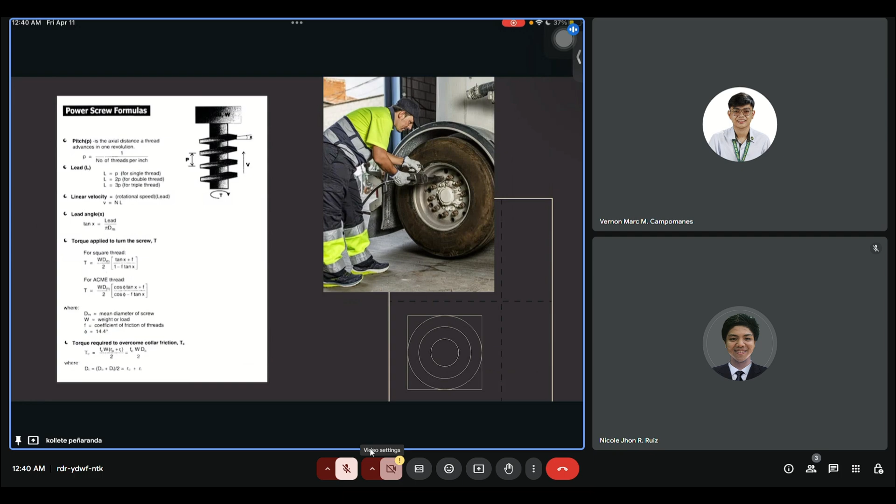Total torque to operate the screw. Total torque is equal to torque plus TC. The output power of screw, PO, is equal to weight times linear velocity of screws. Power input of screws, or PI, is equal to 2 pi Tn. Efficiency of power screw. For square thread, efficiency is equal to power output over power input. Or it can be tangent x times 1 minus f tangent x, all over tangent x plus f plus FC DC over dm times 1 minus f tangent x.

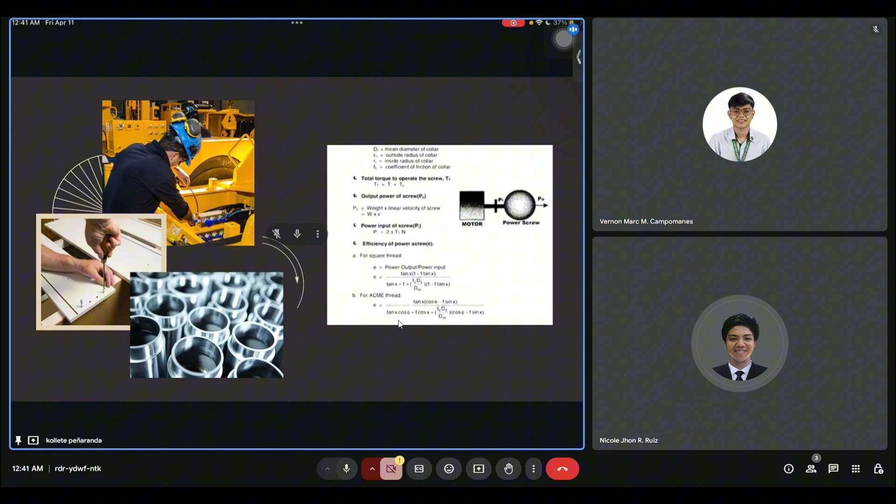For Acme thread, efficiency is equal to tangent x times cosine angle minus f sine x, all over tangent x cosine angle plus f cosine x plus FC DC over dm times cosine angle minus f sine x.

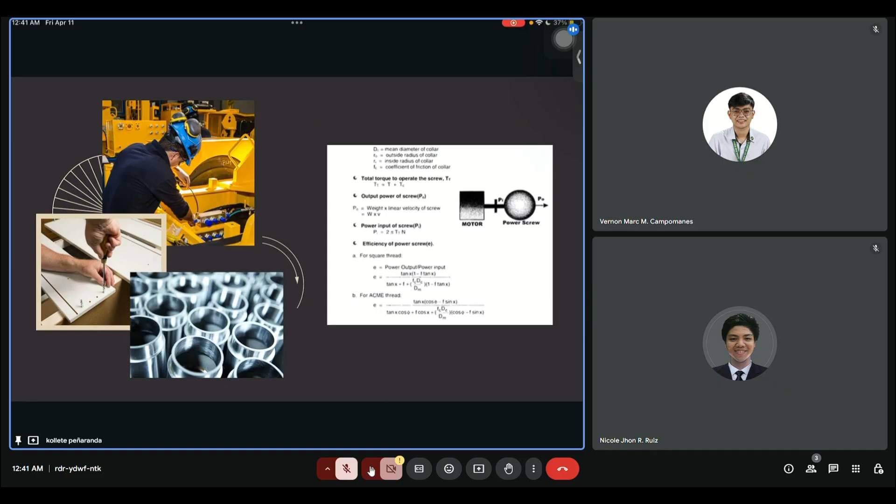The torque required to overcome collar friction of a 100 millimeter mean diameter collar power screw is 50 Newton meter, and collar friction of 0.15. Determine the weight lifted by the screw. The given is diameter mean, collar friction, and the torque of the screw. The formula that we will use is TC is equal to FC W times outer radius plus inner radius all over 2. And diameter mean is equal to outside diameter plus inner diameter all over 2.

The solution is, the given is diameter mean, so we're going to transpose it, and I will evaluate the formula to make the given useful. So dm is equal to the outside diameter plus inside diameter, equivalent to 2 times outer radius plus 2 times inner radius all over 2. So we can remove the 2 by extracting the 2 in the outside radius and inner radius. So what we have left is RO plus RI is equal to 100 millimeter or 0.1 meter.

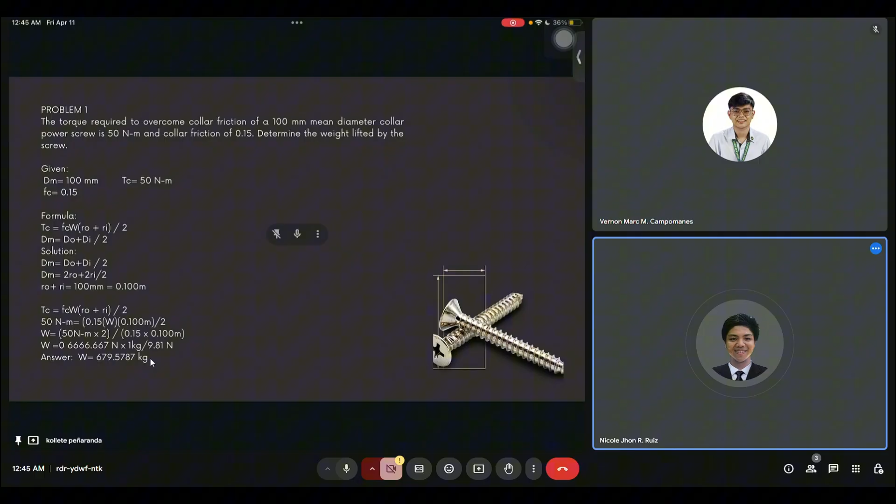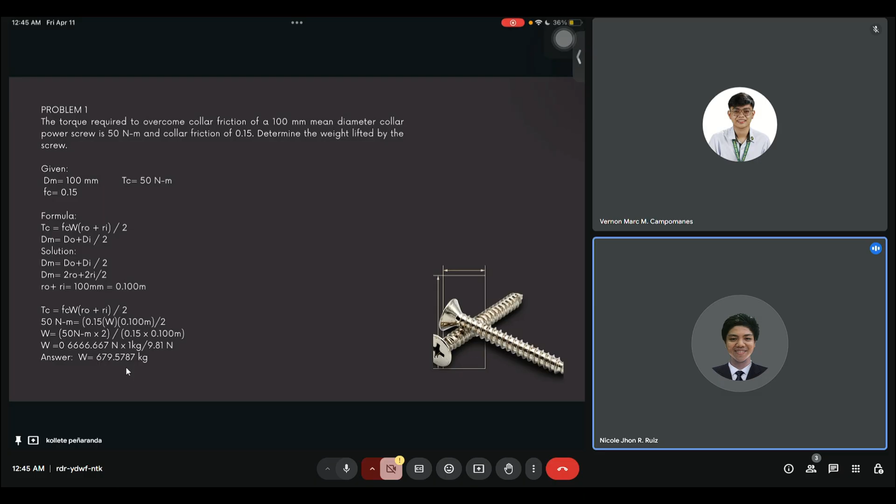The final answer will be 679.5787 kilogram. For problem 2, find the horsepower loss when a collar is loaded with 1,000 pounds, rotates at 25 rpm, and has a coefficient of friction of 0.15. The outside diameter of the collar is 4 inch and the inside diameter is 2 inch.

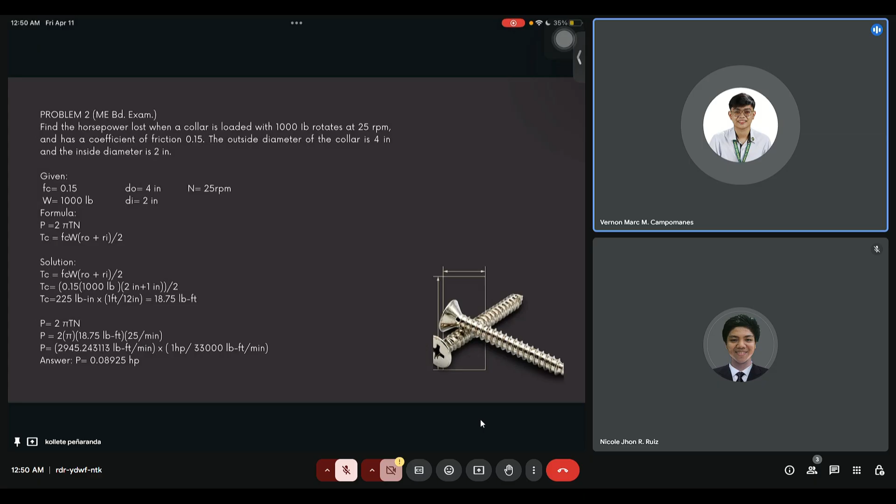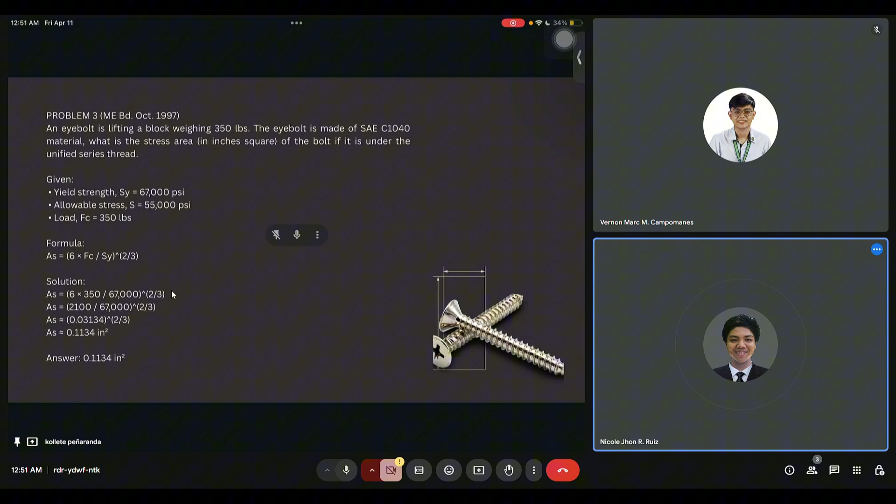Problem 3: an eye bolt is lifting a block weighing 350 pounds. The eye bolt is made of SAE C1040 material. What is the stress area in inches squared of the bolt if it is under the unified series thread? The given is yield strength, allowable stress, and load. The formula that we're going to use is stress area is equal to 6 times Fc over Sy raised to 2/3. The solution is 6 times 350 over 67,000 raised to 2/3. And the answer we will get is 0.1134 inch squared.

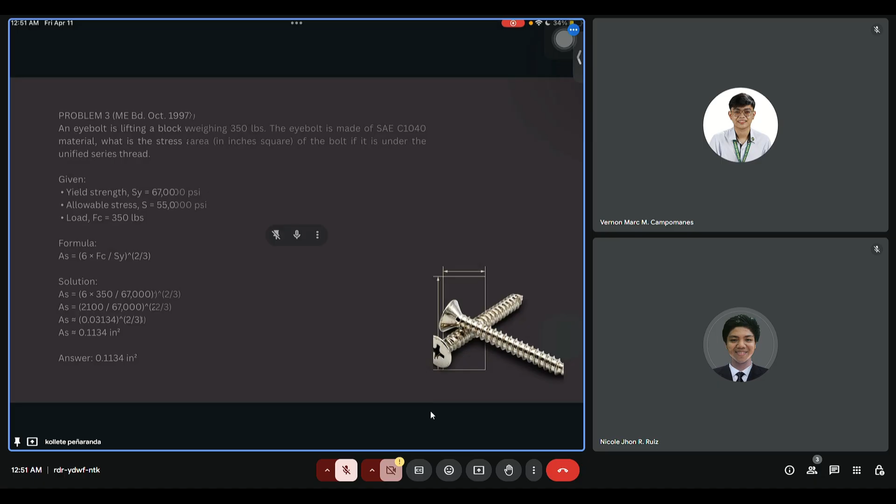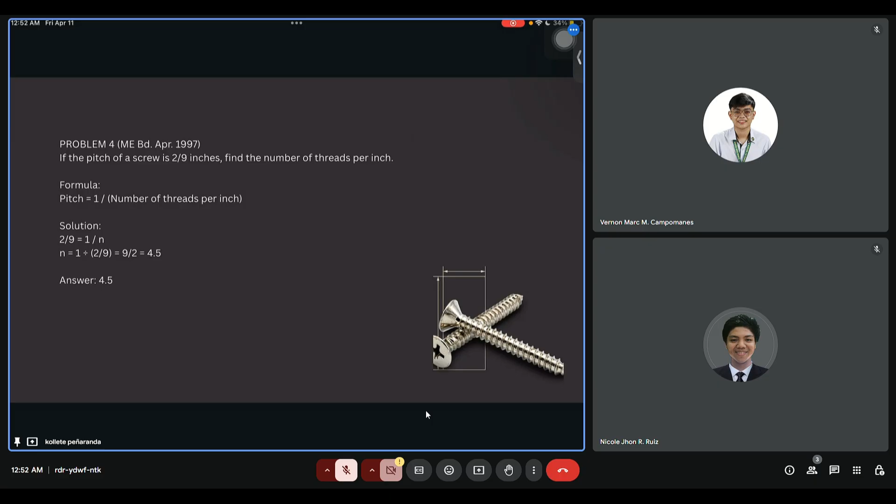Problem 4. If the pitch of a screw is 2/9 inches, find the number of threads per inch. So the formula that we will use is pitch equals 1 over number of threads per inch. By using this formula, we can solve the problem by simply using shift solve, or we can transpose: the number of threads per inch is equal to 1 over pitch. And the answer will be 4.5. And that's all. Thank you.